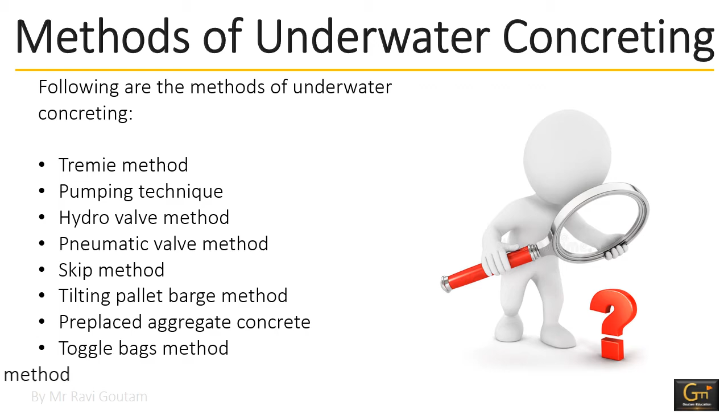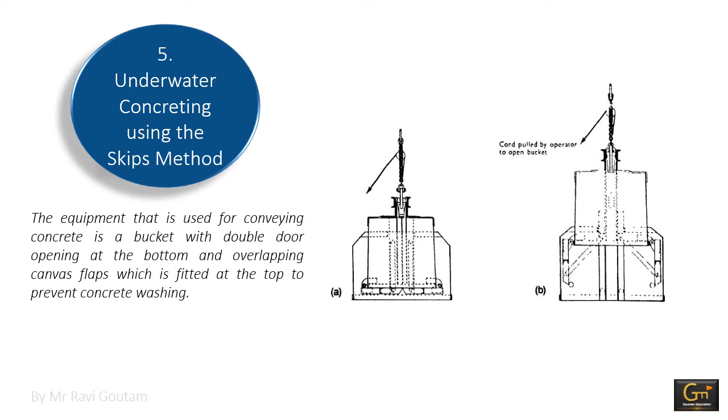Now, underwater concreting using the skips method. The equipment used for conveying concrete is a bucket with a double door opening at the bottom and overlapping canvas flaps fitted at the top to prevent concrete washing. The skip is lowered down through water slowly as soon as it is filled with concrete, and when it reaches the location the doors are opened either automatically or manually.

So the skip technique of underwater concreting is suitable for cases where a large mass of concrete is required for stabilizing foundations and a small amount of concrete is needed for different locations. This figure shows open and closed skips for underwater concreting. Part A shows closed and part B shows open.

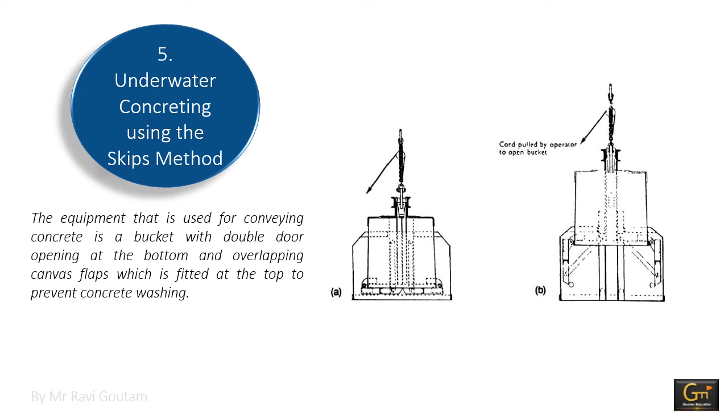This is another method of underwater concreting, that is the tilting pallet barge. This technique is useful for shallow water, and the concrete is poured in thin layers. Along the deck of the barge, a tilting pallet is constructed upon which concrete is spread uniformly and then falls into the water freely.

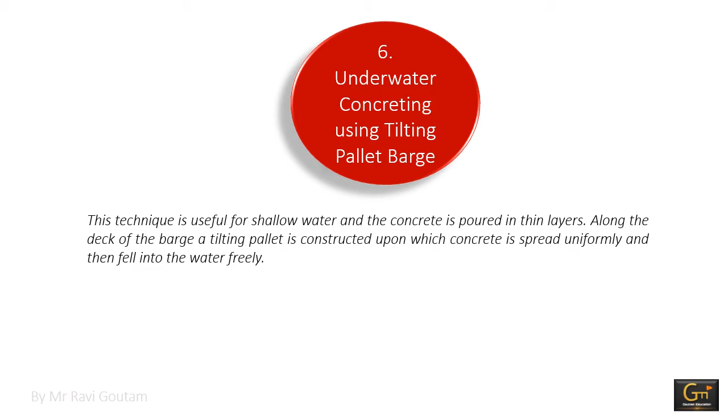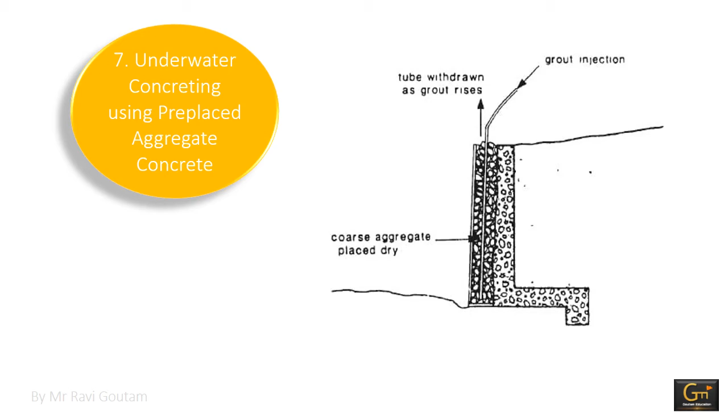So the 7th important point for underwater concreting is pre-placed aggregate concrete. The pre-placed aggregate concrete method is quite good for cases where pouring ordinary concrete is difficult or impracticable. It includes placing aggregate in the forms, then injecting grout into the bottom and filling the forms to the top. To prevent trapping water and air, concreting begins from the bottom. That is why it is necessary to position the tubes in the forms before placing the aggregate.

Concrete strength of about 70 to 100% of conventional concrete can be obtained with this technique. The pipes are distributed with a maximum distance of 1.5 meters and their diameter ranges from 19 to 35 mm. Here we can see pre-placed aggregate concrete with an injecting tube in this figure.

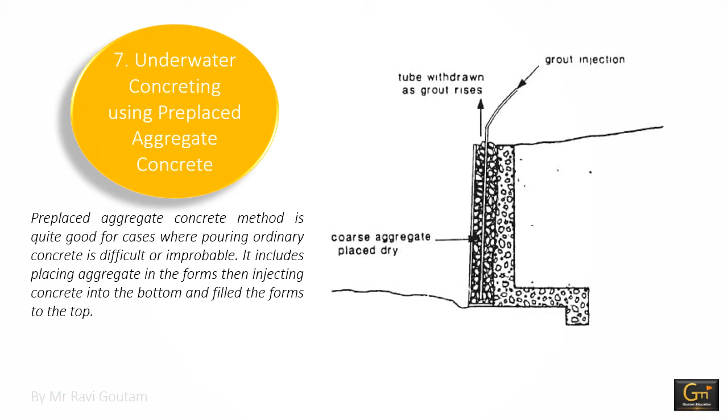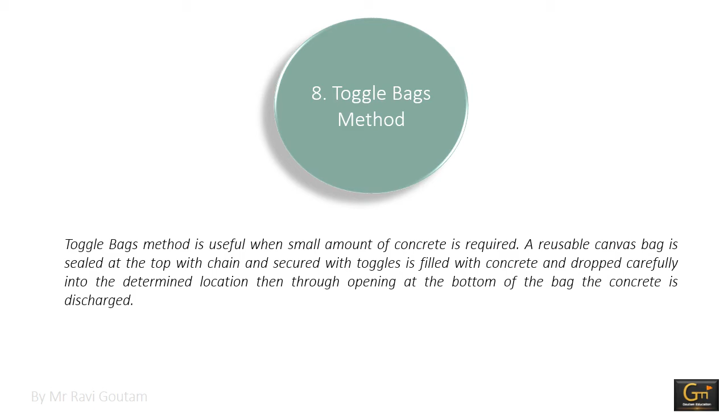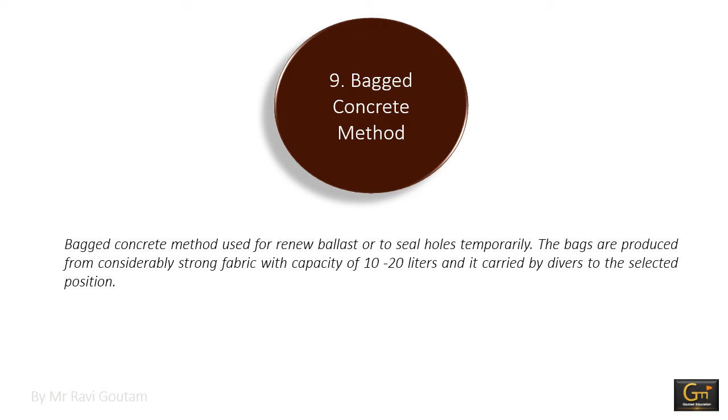The major recent developments by engineers in the underwater construction of locks and dams include the in-the-wet construction method. Underwater concreting uses precast concrete modules as the in situ form into which concrete is placed directly underwater. So the underwater concrete is designed to work in composite with the precast concrete. In-depth studies have shown that in-the-wet construction will lead to substantial savings in cost and construction time, in addition to minimizing the effect on river traffic during construction and eliminating the impact on navigation during rehabilitation.

Many outstanding examples exist of high quality concrete placed underwater. However, a significant number of failures have occurred which have resulted in excessive cost overruns and delays, due in large part to improper concrete mixtures and improper placement techniques. These failures might have been prevented if state of the art underwater concrete technology had been more widely disseminated among engineers and contractors. This report focuses on the basic performance requirements of underwater concrete materials, with emphasis on practical construction issues for in-the-wet construction of navigation structures.